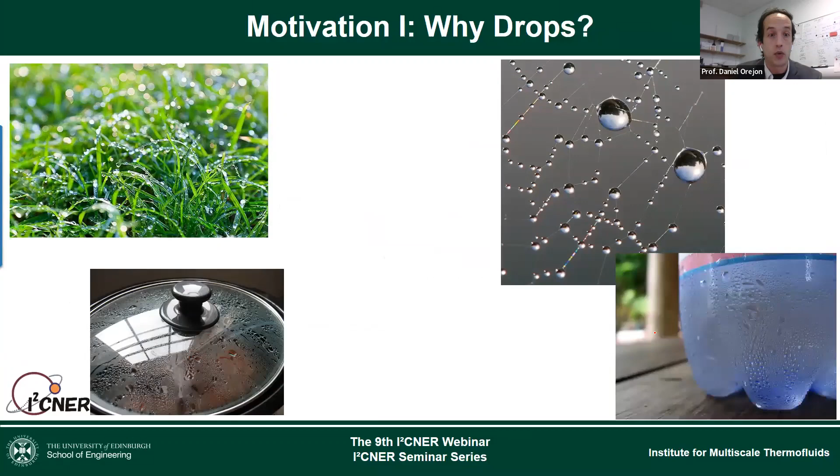So why drops? As you guys know, drops are everywhere in nature. When we wake up in the morning, we have drops in the grass, on our window glass. There are also drops in our glass of beer when we ask for some beer, and there is some condensation that starts to develop because the beer is cold and the wall of the glass achieves the saturation at the dew temperature, and water condenses on the wall.

There are drops also in distillation, drops and phase change in distillation of whiskey, for example. Since I'm in Scotland now, I always need to put this example. But above all, my favorite place to observe drops and liquid-to-vapor, vapor-to-liquid phase change, and I'm sure it's also Takata-sensei's favorite place, was actually the onsens in Japan, which I really miss. I haven't had the chance to visit Japan since December 2019, almost since the pandemic started.

So how can drops contribute, and how drops and of course phase change, both evaporation and condensation, how can we actually, why are they important to our daily life and to industry, for example. So I like to put this example.

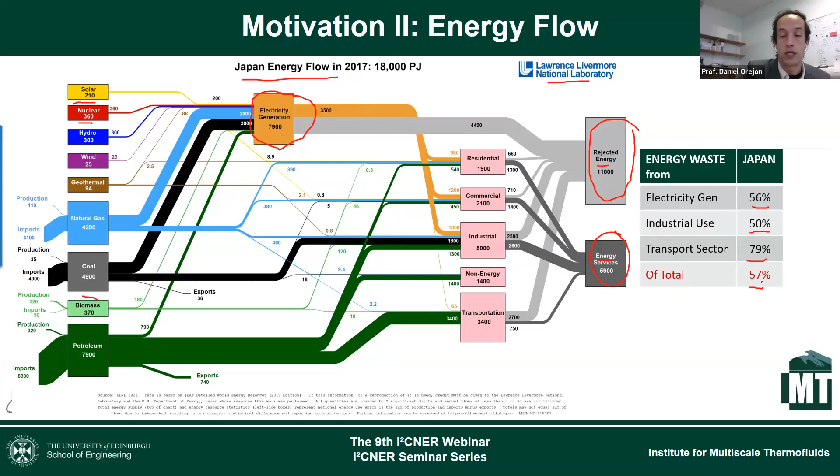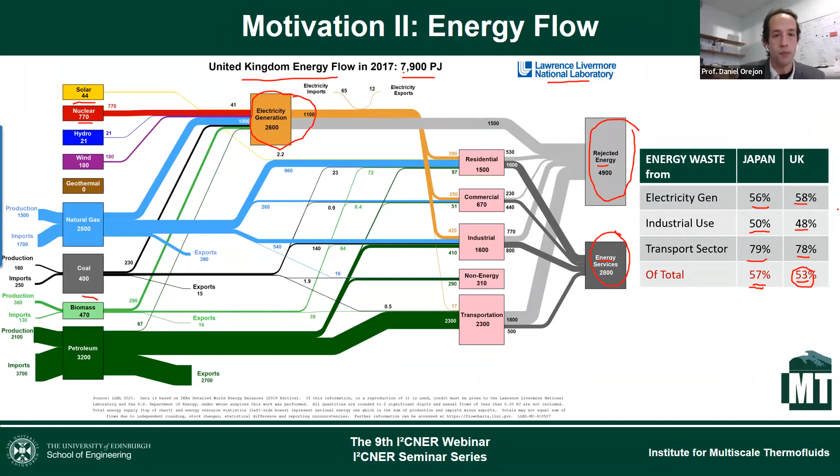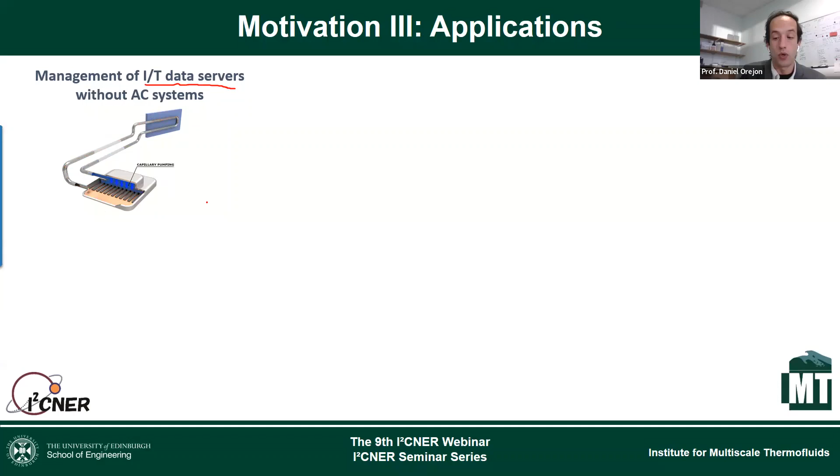So some of the applications where we could implement drops, phase change, evaporation, condensation to try to improve the system is, for example, for the management of IT data servers. Currently, air conditioning units and refrigeration systems account for 1 or 2% of the total energy consumption in the world. So they could be improved and we could have bigger savings.

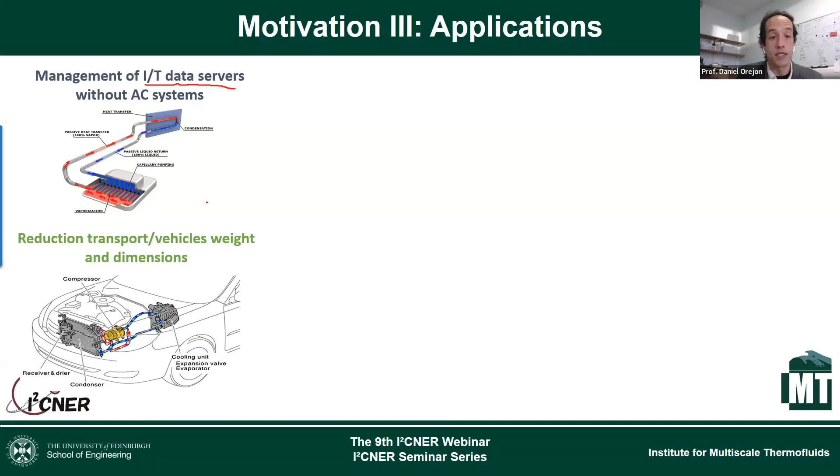In the case of cars, for example, for cooling of engines, if we were to implement phase change instead of single phase, we will be able to decrease requirements for the cooling system for the engine, reducing the weight of the car, and run more miles with the same fuel.

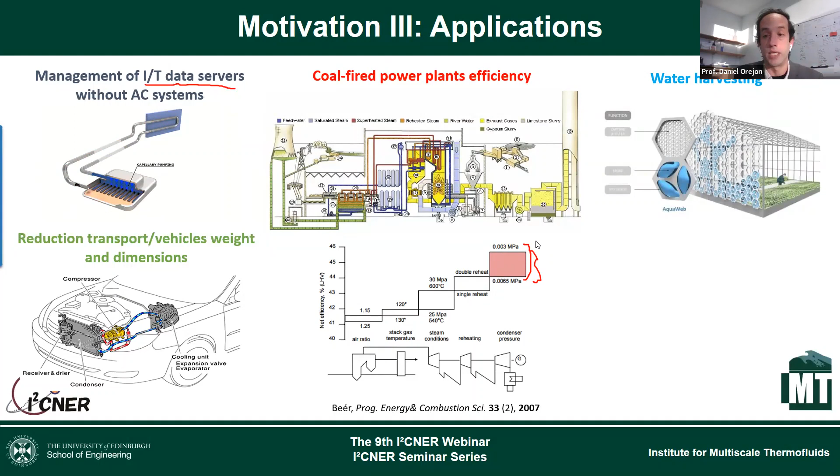And another application is also for water harvesting. For example, there are many regions that are arid and they don't have access to drinkable water. But as we know, in the environment, we can find water in the moisture of the ambient air that could, to some extent, be captured for our purpose.

All these kinds of applications, and my research as well, I like to link with the United Nations Sustainable Development Goals, more in particular with number 6, clean water and sanitation, and number 7, affordable clean energy.

So once I have introduced a little bit of the motivation, I wanted to give you a little bit of background. I don't want to put much emphasis here.

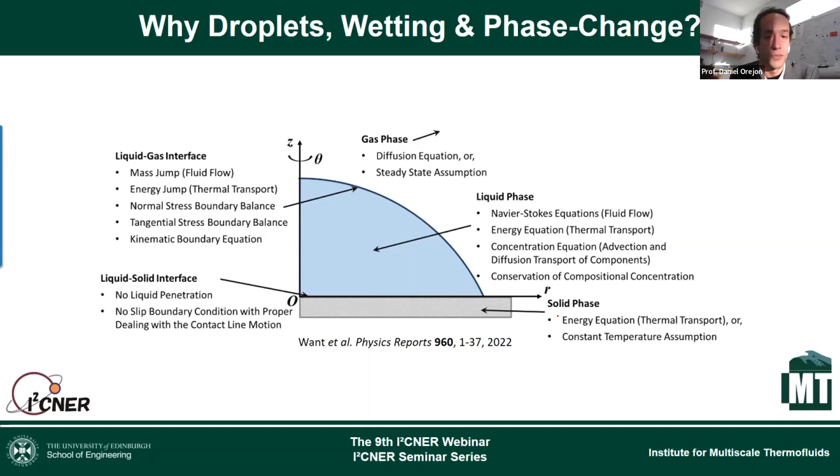So here is an example of a droplet evaporating, and we can see that we may have mass diffusion, convection inside of the droplet, heat transfer towards the substrate, and wettability also plays an important role. All this, as the droplet evaporates, can actually be utilized to create nice and confined patterns in the droplet. But it also helps us understand how the droplet evaporates and what are the final conditions upon the complete phase change.

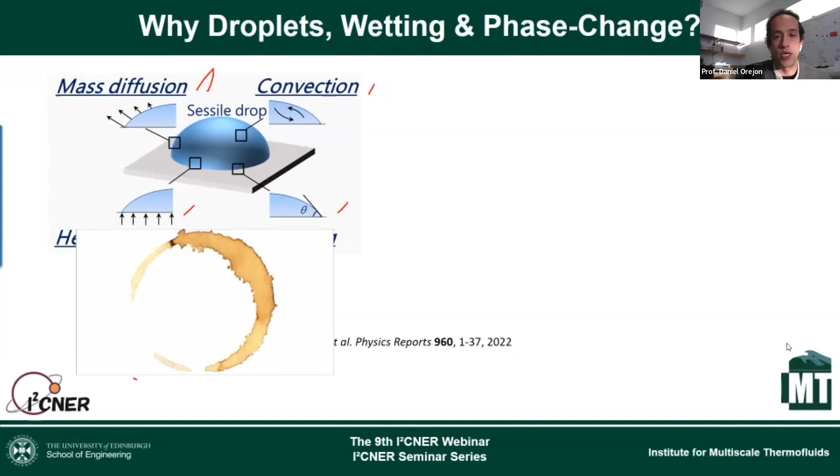And here on the left, we have the opposite phenomenon, because during my PhD, I was actually involved in the study regarding evaporation of droplets. However, when I moved to I²CNER, because of the capabilities of Takata Sensei's laboratory and his encouragement to dive into a different topic, I actually started to look into the opposite phenomenon, that of condensation.

As a simple aside, it looks like there will be many similar phenomena taking place, but you can see that in occasions mass diffusion, convection, and heat conduction actually differ. And depending on the wettability of the surface, you can have different condensation mechanisms and different shapes of droplets that, at the end of the day, are going to influence our heat transfer during phase change.

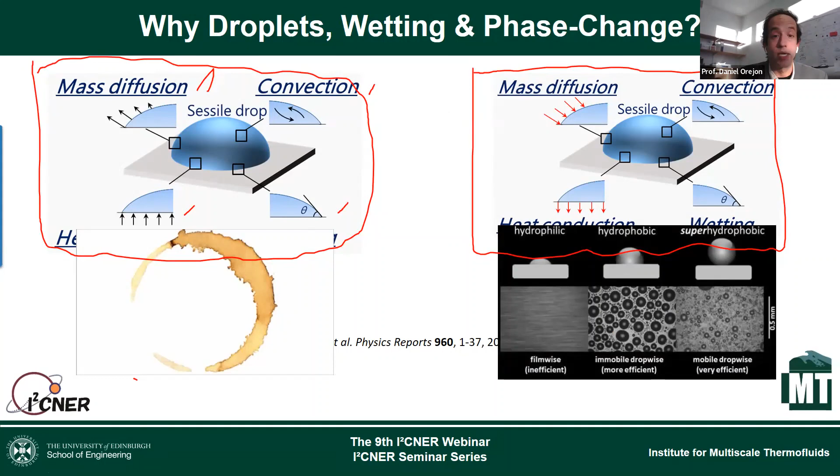So now that I have done this small introduction, I'm going to present the 4 different topics that I would like to introduce today. Maybe for the last one we will not have much time, depending on how detailed I am on the other ones.

But basically, I wanted to introduce here different fabrication techniques that I have explored in the past years. One of them is deep reactive ion etching. All this pillar fabrication technique has been done at the Scottish Microelectronics Centre. So this is kind of new research for me since I joined the University of Edinburgh.

I wanted to introduce soft lithography as well, and how we can replicate the features of plants using this technique. This work was done while I was an assistant professor at I²CNER. In both of these processes, we can actually get controlled structures. In the deep reactive ion etching one on the left, we have very accurate resolution, and we are the ones who decide what the patterns are.

In the case of soft lithography, we get very good microscopic resolution, a little less than nanoscopic. But with this technique, we can replicate and copy structures from other structures, or even from plants or living organisms.

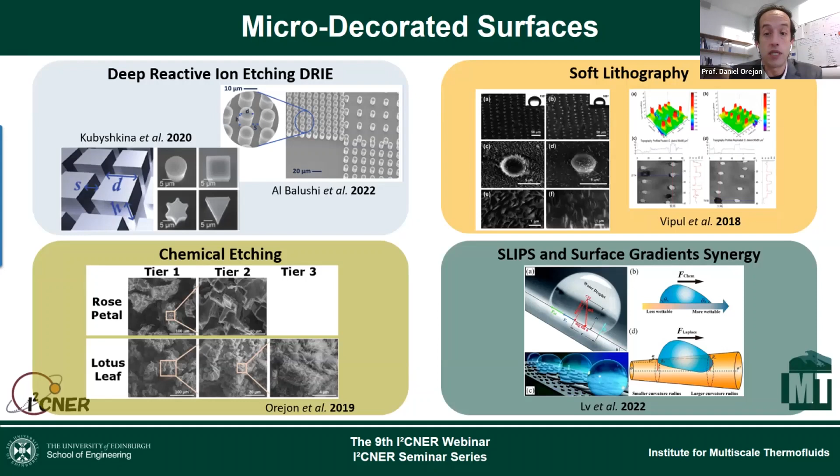Another topic I'm trying to combine lately is basically the use of structured surfaces that combine a wettability gradient or thermal gradient with SLIPS, or lubricant-infused surfaces, which we know have very low adhesion to a surface and are quite mobile.

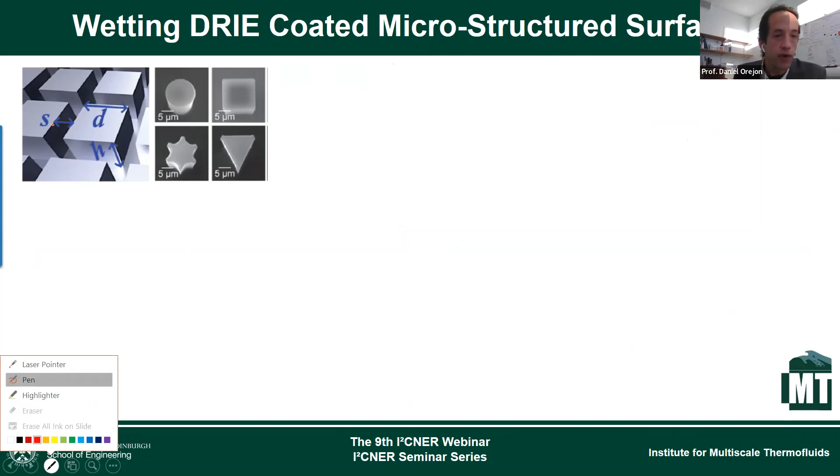So going into the first topic: wetting on microstructured surfaces. This is one of the projects I was involved in as soon as I joined the University of Edinburgh. In this project, we use surfaces with varying spacing but fixed diameter and height, with different geometries created: circular, square, star, and triangle pillars. Then we put these surfaces in our drop shape analyzer, sometimes within custom-built setups, so we can image from any side we want, from the top, from the side, and do analysis of the different azimuthal angles, for example.

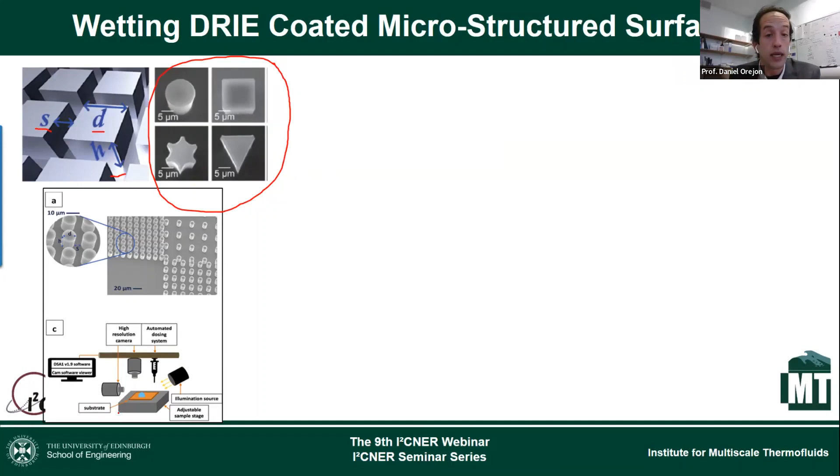So when we started this work, our student Veronika began with water on different pillar geometries with fixed spacing. In these geometries, what we see is just a drop that balls up and sits on the surface with very high contact angles because the surfaces are hydrophobically coated. So with a hydrophobic surface with structures and a high surface tension fluid, the droplet just balls up and does not wet the surface.

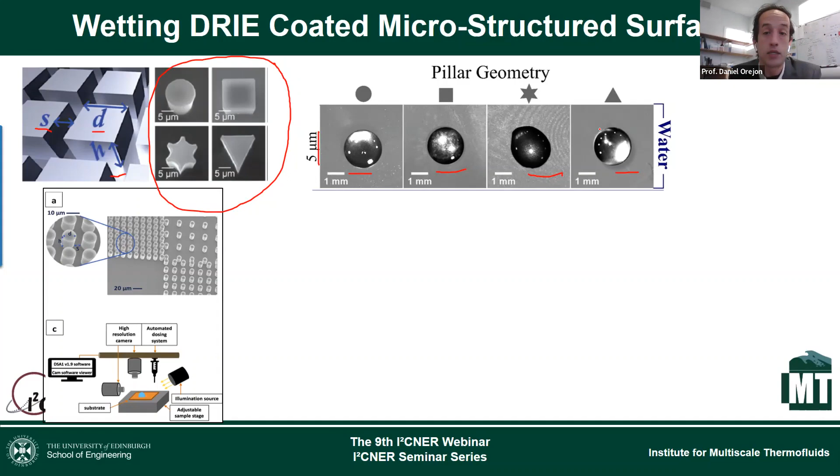However, when we move into ethanol, an organic solvent also very much used everywhere, it's necessary to know the different properties and characteristics: how it wets, how it evaporates. When we did this on these different surfaces, you can see that because of the wetting nature of ethanol, it tries to spread and wick through the structures, depending on the spacing here, and also depending on the geometrical configuration that we had.

So we had circular pillars here, square pillars here, a sort of star here, and triangle. We can also see that if the spacing is large, because the length scale of the spacing is larger than that of the microstructures, the droplets typically look very round because they barely see the structures underneath. They behave almost like on a smooth surface.

However, when we decrease the pillar spacing, because we have many more structures and the ethanol tries to wet all of them, the droplets start to acquire different types of shapes. So for regular types of structures, we typically go from a square, to octagonal, to circle.

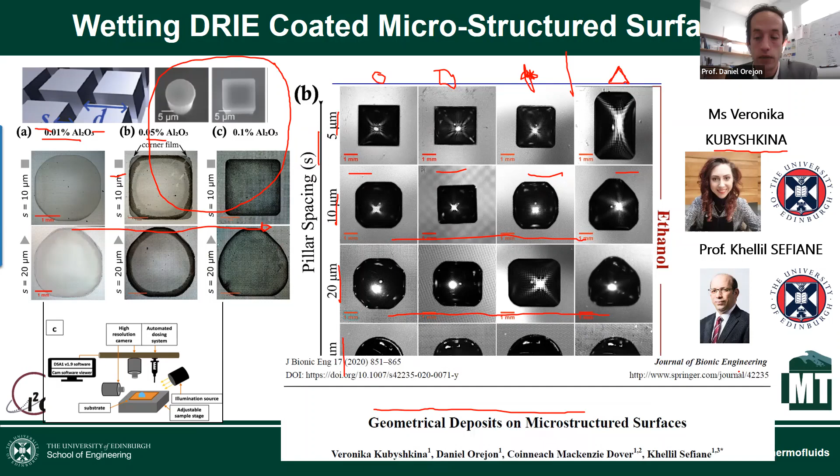This work was done by Veronika, and she got a couple of nice outcomes: a publication in the Journal of Bionic Engineering, and we recently also published a chapter within a book on the drying of complex fluid drops. What I just showed you is just a small taste of what you will find in both the publication and the book chapter, where we provided many more results, analysis, and discussion on the phenomena.

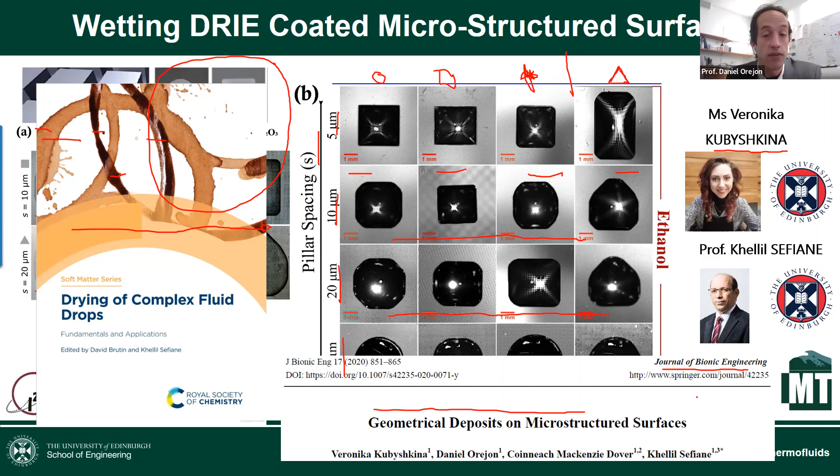So motivated by this, seeing how the different surface tension of the fluid may affect the wetting behavior, we isolated one type of geometry. In this case, we're looking into circular pillars, as we can see here, varying in spacing similar to what you saw before. All this work has been done by my student, Holud, who is self-funded by her government, the government of Oman.

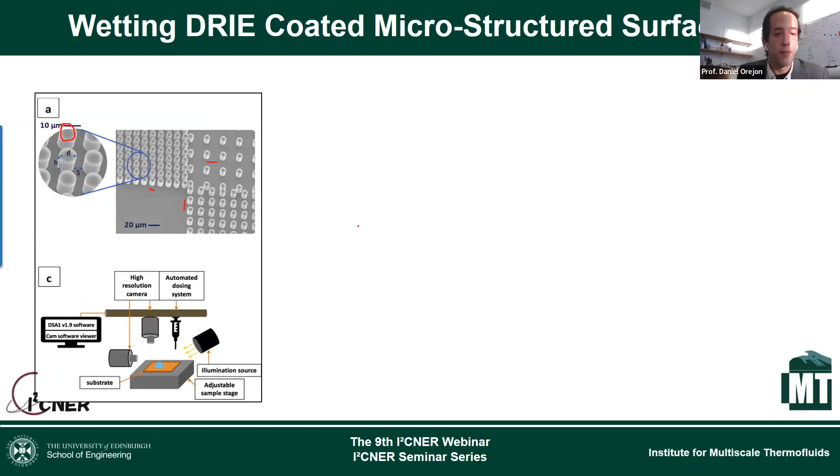So we had six different types of surfaces, six micropillar spacings: 5, 10, 20, 40, 80, and 160. And what we did is we varied the concentration of ethanol, so we have an ethanol-water mixture here.

So 0% means pure water, 100% means pure ethanol. From here, we can see that when the spacing is small, when we have water, a high surface tension fluid, the droplets round up and we have high contact angles like the one we saw before. This is typically called the Cassie regime, where the droplet just sits above the structures without wetting.

However, as we increase the concentration of ethanol, because the surface tension of the mixture decreases, lower surface tension fluids tend to wet more. They like the surface more, and the other way around. Because of this induced spreading, we are moving towards smaller contact angles. The droplets wet more, and we have a different regime here where it's still non-wetting, but not in the Cassie regime—it's in the non-wetting Wenzel regime.

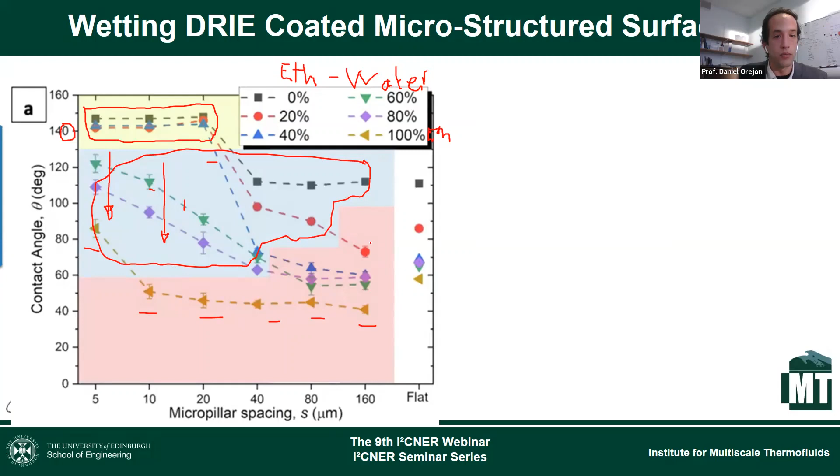And then we have this other region here at the bottom in red, where the droplets actually spread quite a bit, typically spreading more than they would on the original flat surface.

So here is basically the same kind of regime map, just based on ethanol concentration and spacing. As you can see, we can actually have different geometries of the droplet depending on the surface tension and the pillar structure.

As mentioned earlier, for large micropillar spacing, the droplets basically do not see the surface, and typically when we are on the right-hand side, regardless of the type of fluid, the droplets behave almost like on a smooth surface—round with a circular geometry. However, when we decrease the spacing of the pillars, the droplets start to see more of the structures.

For high water concentrations, droplets are round, as mentioned earlier. For high ethanol concentrations, the droplets start to acquire some sort of octagonal or even square shapes, as you can see here.

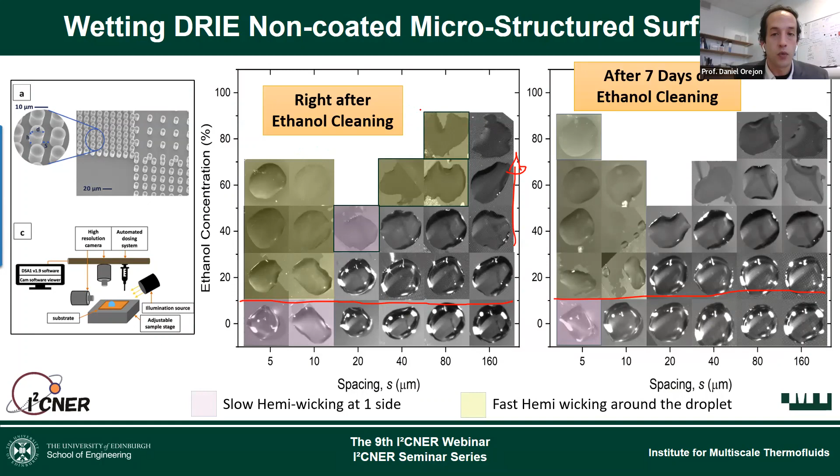There is also a change in the droplet shapes—they start to become more irregular, as you can see here. At some point, because of the low surface tension, the fluid just wets and spreads all over the surface. Comparing before and after cleaning with ethanol, there isn't much difference, so it's not so interesting.

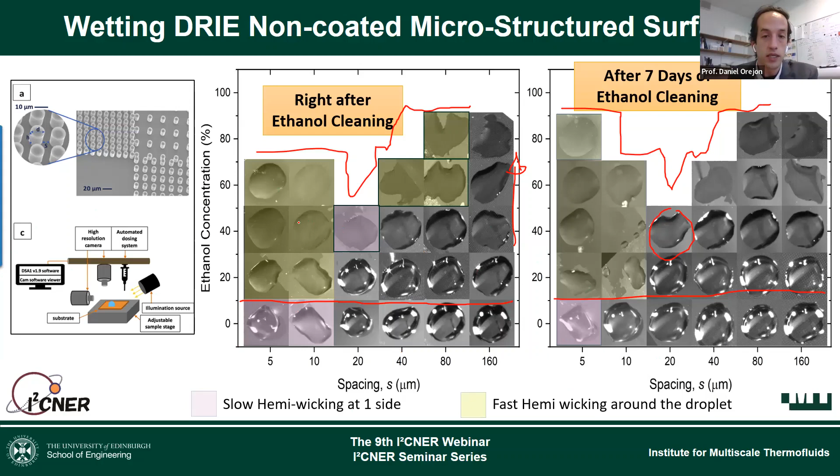However, when we clean the surfaces with oxygen plasma or air plasma, right after cleaning—this is for water—you put the droplet down and it immediately spreads all over the surface. So these are very high wetting surfaces right after cleaning.

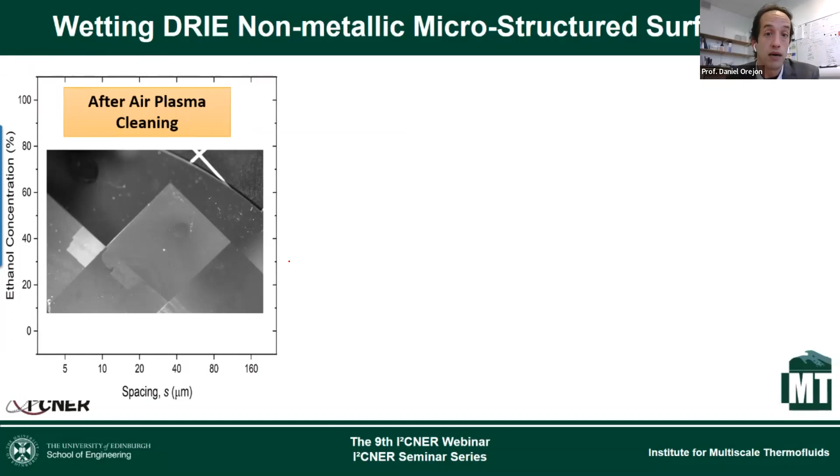Waiting 3 days, we start to see some kind of irregular shapes, but in most cases after the contact line we can see some sort of hemi-wicking behavior. So the droplet is not self-confined as it was after cleaning with ethanol, but it actually keeps spreading.

For high pillar structures, you can see that the droplets don't have an axisymmetric, or symmetric, shape at all.

However, when we wait even more, it is possible to get a more well-defined droplet footprint, and the droplets start to be more regular in shape.

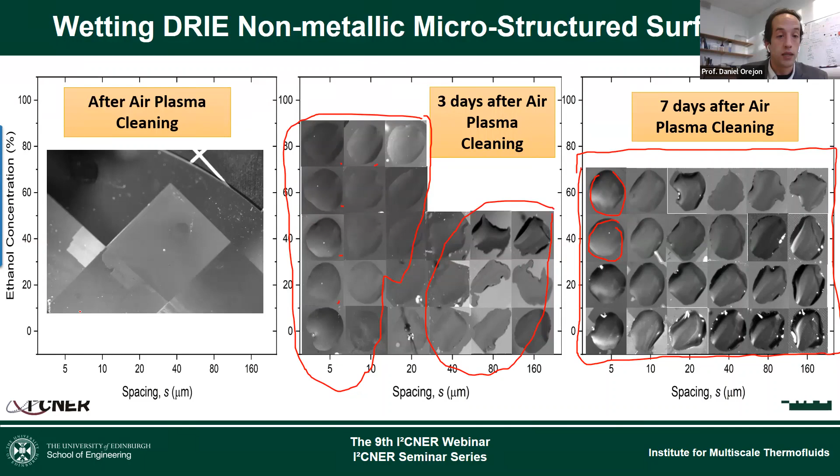With this, I wanted to point out that for hydrophilic surfaces, when the material is not coated, there is typically some interaction with the environment, and as time passes this interaction increases and the surface becomes more hydrophobic. This is why at the beginning we could not deposit or see a drop upon deposition, whereas as time moves forward we are able to see these droplets showing a nice shape.

Having talked a bit about wetting, I wanted to include our efforts on phase change, also on structured surfaces. For this evaporation study, we use hydrophobic coated micropillar surfaces.

These are the same surfaces where we saw the wetting characteristics before: when we have short spacing between pillars and high surface tension fluid, like water, we get nice, round droplets. Whereas if we move into larger spacing, the droplet starts to behave more like on a flat, smooth surface.

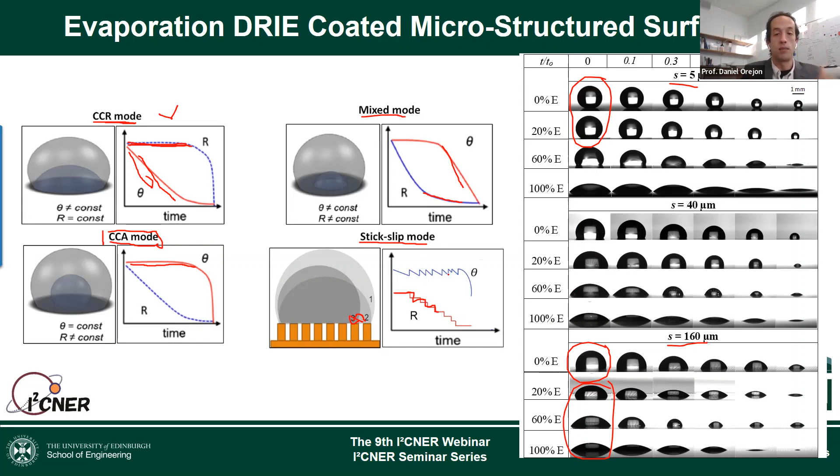And we also have a stick-slip mode, where because of these small structures, the droplet evaporates, and once it has evaporated a certain amount and gained a certain free energy, it is able to jump to the next pillar or pin. As a consequence, we get a stepwise fashion where the contact angle is pinned, then jumps, pins, jumps—while for each jump the contact angle increases to account for evaporation.

So those were the four main regimes. Now I'm introducing the experiments on high surface tension water and 20% ethanol water on 3 different pillar configurations. Remember, very close spacing versus large spacing, almost smooth surface.

When we look into these evaporation regimes, you can see here we have a solid line that represents the average, whereas the shaded area represents the standard deviation of at least 3 experiments. So you can see how hard my PhD student has worked. I think overall he has done more than hundreds of experiments on evaporation to try to understand better how pure fluids and binary mixtures behave on these surfaces.

But mainly when we look at the surfaces, what we can see here is that mainly we have droplets initially evaporating in CCR, as mentioned earlier, contact line pinned, and then it typically, because of the structures, goes into a stick-slip behavior.

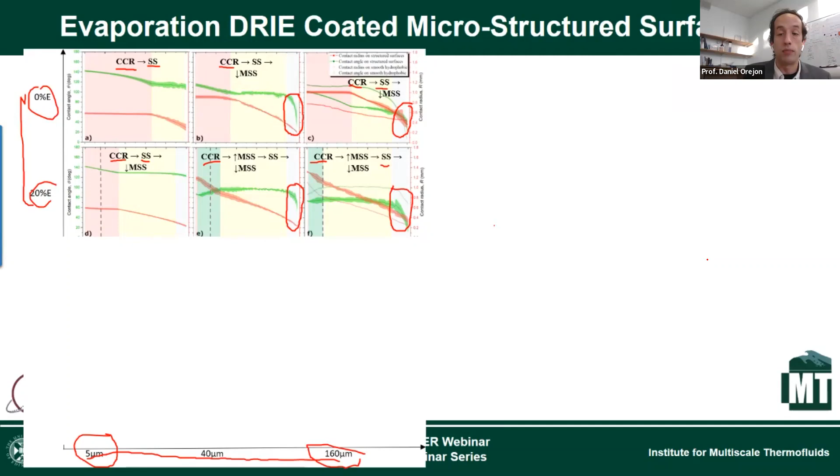So we have contact line pinning, jumping during the evaporation. But interestingly, because of the nice resolution of our measurements and our technique, we were able to focus really well at the very end of the evaporation, and we were able to report a different mechanism than the typical stick-slip. Remember the stick-slip behavior I just showed you before.

Typically, the contact angle always ranges within the same values when this stick-slip is happening. This is the case of this yellow area, where you can see stick-slip behavior of the contact angle, all the values remain oscillating within the same range. However, at the very end, where we are meant to have the typical mixed mode, because of the presence of the structures, what we see is actually a sort of decreasing contact angle mixed stick-slip mode.

So we don't have the stick-slip oscillating at the same rate. We actually have stick-slip decreasing, and understanding this is very important to pinpoint what is the surface energy, what is the shape, what is the behavior at the very last moments of the evaporation. In the case of droplets where we have particles dissolved, this will play a major role on how the deposits arrange. So it's very important to understand this.

When we move into higher ethanol concentrations, remember the droplets wet more of the structures. We are starting with lower contact angles, but as in earlier cases, we start mainly with the CCR constant radius mode because of the pinning. But it's very interesting in this — actually for 20 and 60%, what we saw is that there is a region where you can see how typically the contact angle either stays constant or decreases because of evaporation, right?

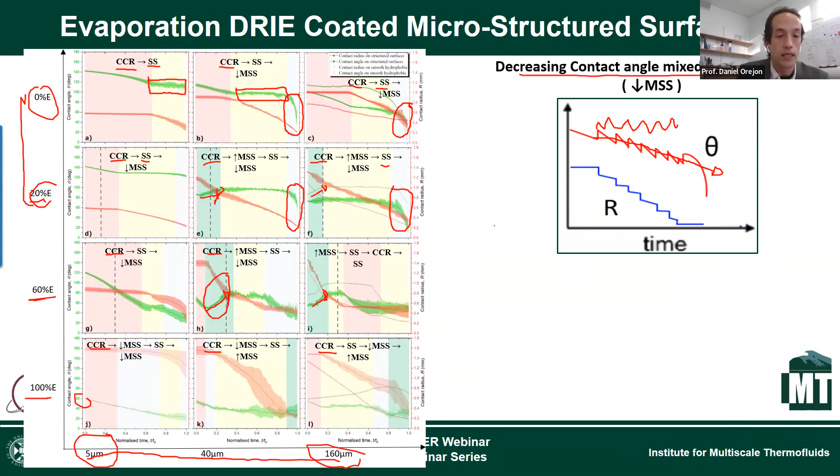But as I am drawing here now on the surface, you can see that in all these cases, there is actually a regime, a time where the contact angle is not decreasing but actually increasing. So we are having this other behavior also in a mixed stick-slip fashion. This behavior has also not been reported before, and it's important because this increasing contact angle also affects the radius. If there is conservation of volume, increasing contact angle means the radius is going to decrease faster, so the footprint of the droplet is also going to decrease faster, as pointed out here.

This mechanism here above, as you can see, is just a consequence of the evaporation and the presence of structures that induces more pinning, and it doesn't allow the contact line to recede quickly enough for the contact angle to keep constant. However, in this other case down here, probably Kita-san and Takata-sensei will know the reasons for this, because in the past we worked with ethanol and water.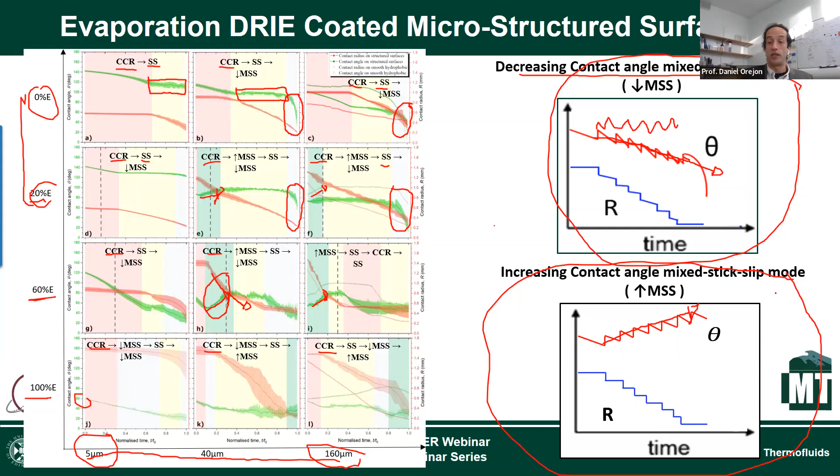We actually worked with ethanol, but as we were evaporating ethanol in the conditions we were investigating with high relative humidity, the ethanol was actually transitioning into water. As that happened, the surface tension of the fluid changes and increases, because water has higher surface tension than ethanol. And what was happening is that our contact angle was increasing in time as the droplet evaporated, all the way to the contact angle of water.

Here it's not exactly the same, it also happens for our case with 100% ethanol, but the main reason here why we are having this mixed stick-slip with an increasing contact angle is basically that we have an ethanol-water binary mixture. Ethanol is more volatile than water. As ethanol evaporates, the surface tension of the droplet also changes. So as ethanol evaporates, the droplet behaves more water-like, and as such it wants to be more round.

It wants to be more spherical. As you can see here, the contact angle, as reported earlier, increases. So these are two new mechanisms complementary to the stick-slip, where our contact angle increases and decreases depending on the conditions studied.

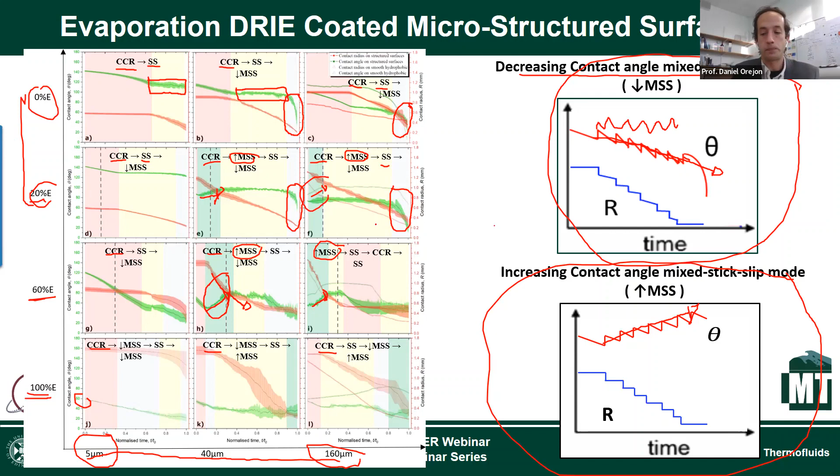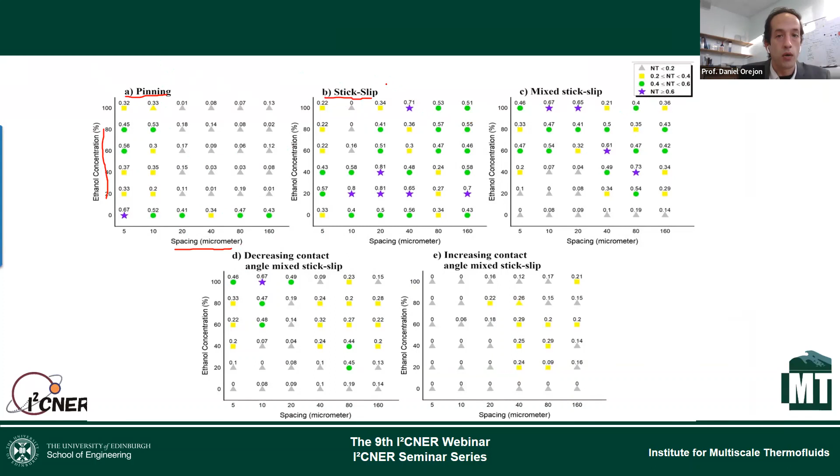So my student also, in order to give more insights on how droplets evaporate on microstructures, she analyzed the different normalized times at which the different droplets, ethanol concentrations, and pillar spacings show how the normalized time of the different regimes behave.

As we can see here, we are able to draw this sort of boundary, where for small spacings and for water, a high surface tension fluid, we actually get pinning of the contact line for longer. So typically the initial stage takes longer for the contact line to depin and move into a different droplet footprint.

Than when we look at the different ethanol or binary mixtures. Regarding the stick slip behavior, it looks like there is a big boundary here. So most of the droplets on structured surfaces will display this sort of stick slip behavior.

Note that here this is the traditional stick slip, reported in the literature, with the contact angle range varying, whereas here we also have the mixed stick slip where the contact angle either increases or decreases. For this mixed slip mode, as mentioned earlier, we need ethanol in most cases, above all for the increasing contact angle mode. We need some ethanol present in the mixture.

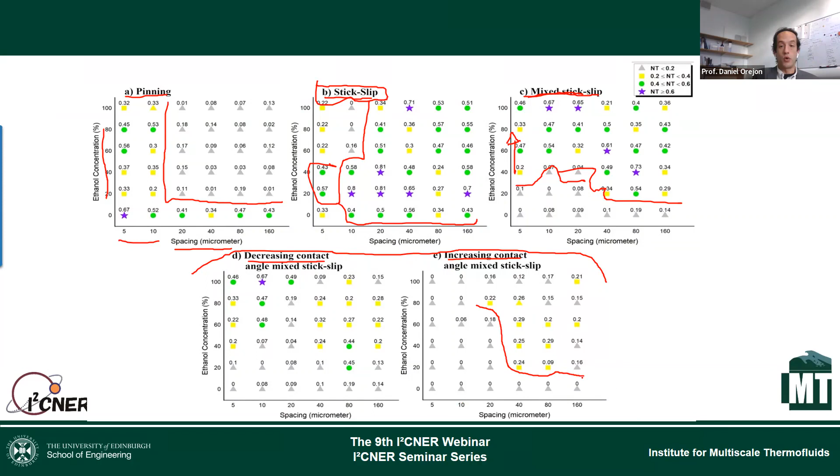These two figures at the bottom just tell us from the mixed stick behavior how much the behavior is in the decreasing contact angle mode or in the increasing contact angle mode. And as pointed out earlier, for the contact angle to be able to increase as the droplet evaporates, there is a need for having ethanol on the surface.

So next, as you can see here, the behavior is very, very complex. There are so many parameters that we can look at to try to give some nice further explanations on the different wetting behaviors as well as phase change.

And these figures here give us a bit of a summary on the jumps of the contact line as they evaporate. I think the main takeaway points are basically that when we have short spacing, all this stick slip behavior is governed basically by the structure. So most of the jumps taking place during evaporation are in the same order of magnitude as the pillar spacing.

This is true for 5 micrometers, 10 micrometers, and 20 micrometers as well, where you can see the average values are always in a similar range as the pillar spacing. However, when we move into larger spacing, we can see that these average jumps of the contact line now, in most cases, lie below the pillar spacing of the different droplets.

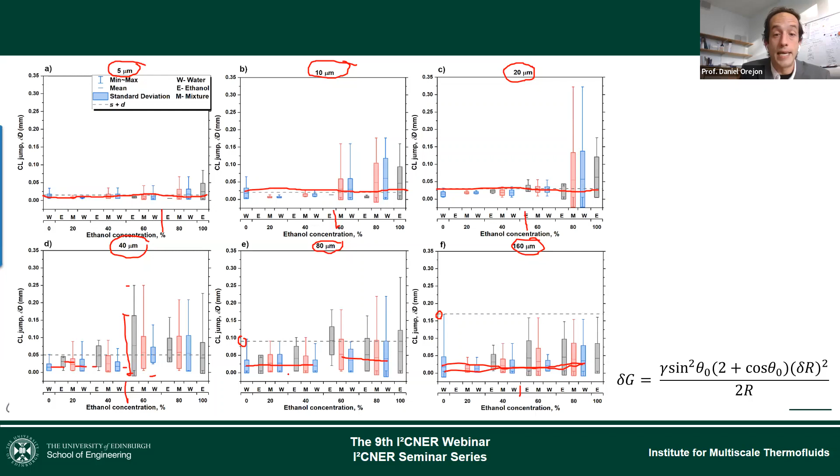Notice also from this figure that as we increase our ethanol concentrations, for 60% or above, the deviation on the measurements, the standard deviation, maximum and minimum values, also start to get bigger. This is because at higher ethanol concentrations, as I mentioned earlier, we are getting more irregular shapes, square, octagonal, and those irregular shapes play a major role on the pinning behavior of the contact line.

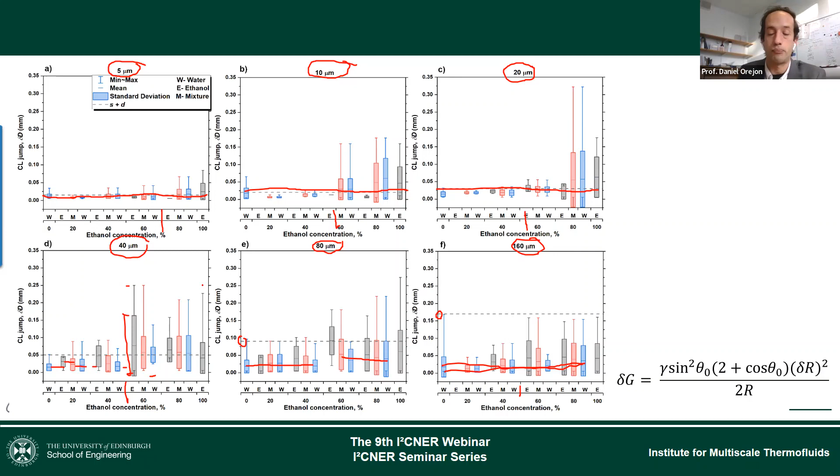So this work was done mainly by my student, Khaloud, in collaboration also with Professor Sefiane. And I was very glad for her that she received the best poster for experimental research at the UK Heat Transfer Conference.

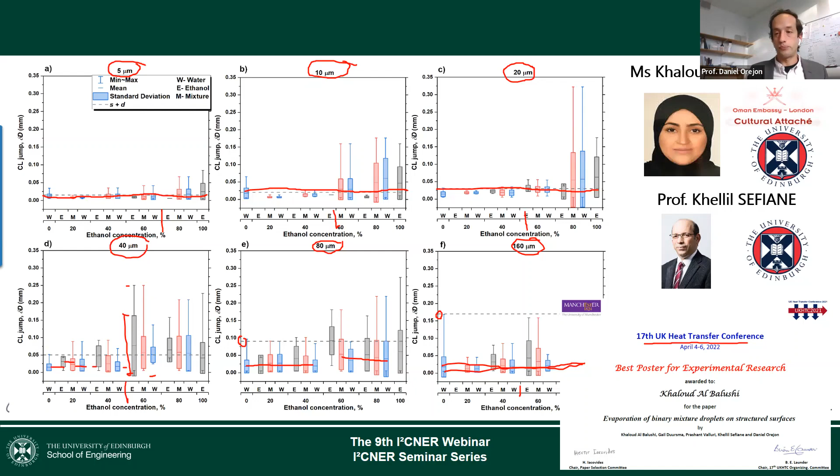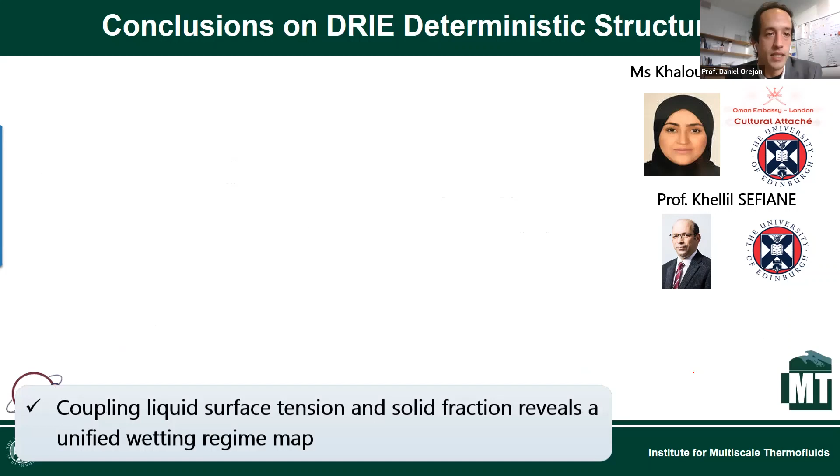So I think I'm going to do a summary of this, and I'm going to skip to the very last part of the presentation. Although I had a couple more topics to talk about, for the convenience of time, I think I should end the presentation here.

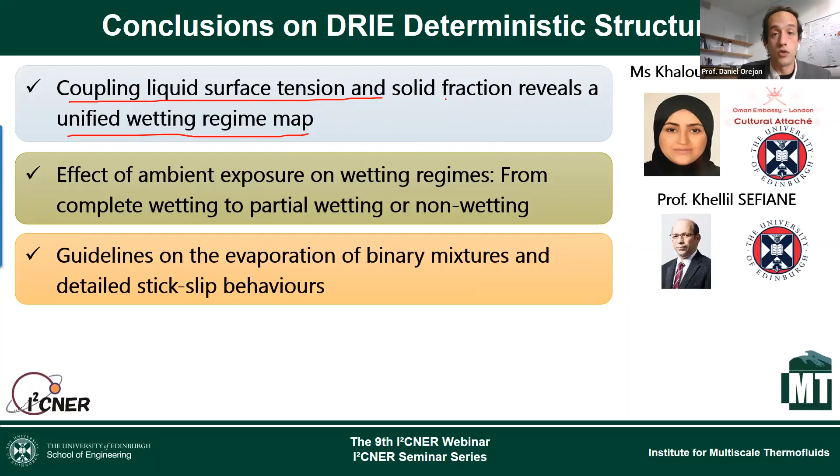As I mentioned earlier, the first part of the talk was to provide a unified wetting regime map that couples surface tension and solid fraction, so that in the future, if we want certain droplets with certain shapes on a surface, we are able to utilize the size and surface tension of the fluid we want.

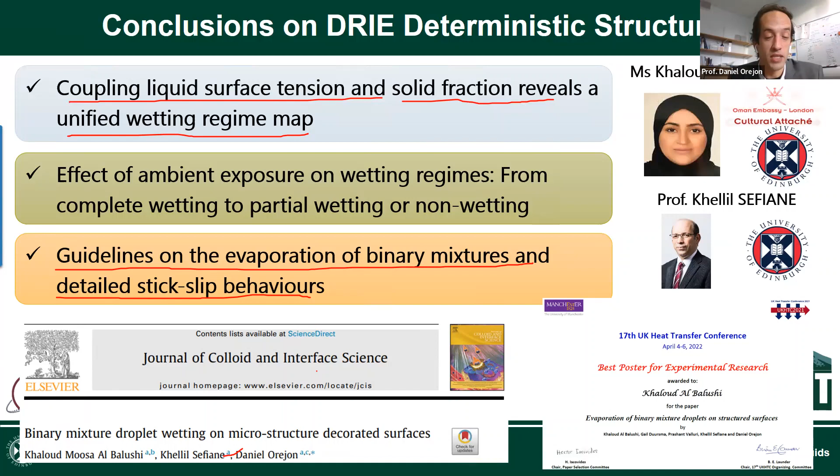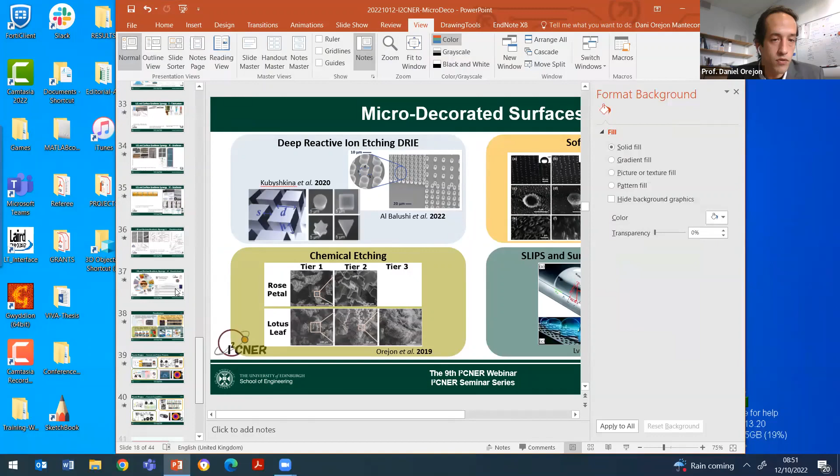I just wanted to introduce very quickly in this slide that we are not just doing all the research that I just presented, looking at the wettability and different surface tension of fluids, but we are also very much interested in how the atmosphere actually interacts with the surface and how the wettability changes over time, as one of the parts I mentioned before.

And I am very happy to be able to keep working on this topic with some of my collaborators that I acquired while I was at I²CNER, for example Professor Takata, as well as Professor Miljkovic from UIUC, and other colleagues of his that some of them might also be in this presentation.

I secured a small grant from the Royal Society, and I was able to buy this very nice microgoniometer that I had the pleasure to use at the University of Illinois when I was on a placement there, to be able to study the advancing and receding dynamics.

And I have a PhD student, Janice, who has just started last week. I'm also very much interested in functional surfaces for condensation phase change, and to this end I have a PhD student working on this topic.

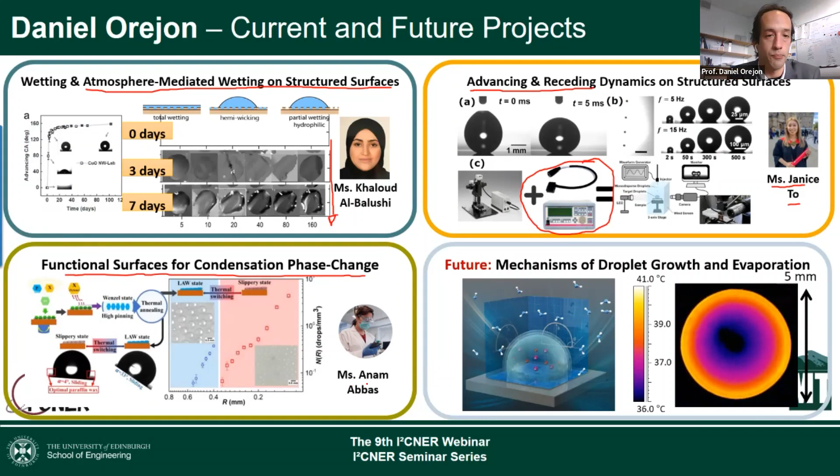Here, very briefly, are some of the capabilities from my lab, in case you like any of the topics or research that I introduced before, and you would like to explore any of these techniques.

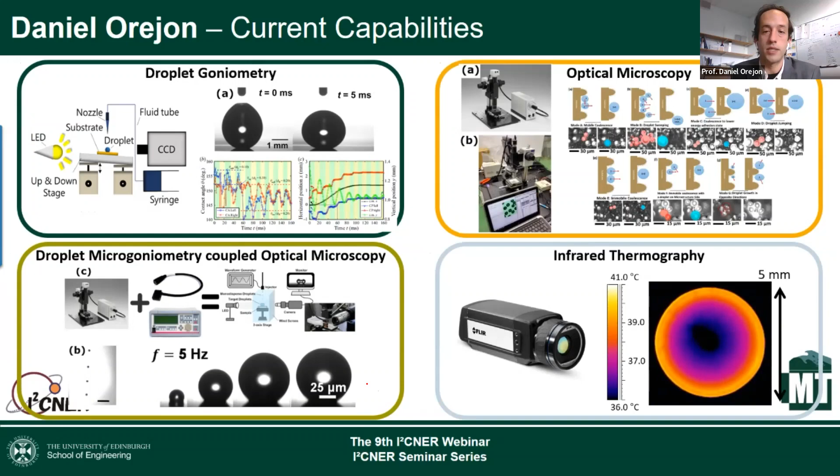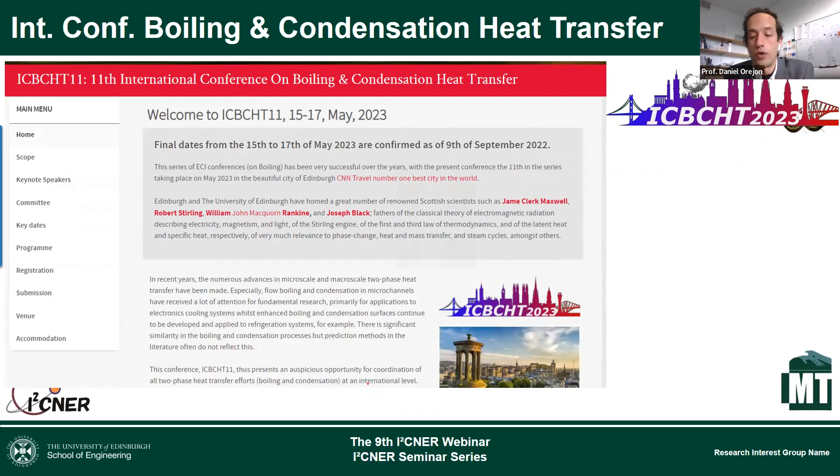Just to finish, I would like to introduce that we are organizing the International Conference for Boiling and Condensation Heat Transfer, which takes place this May in Edinburgh. We have already secured very well established researchers in the topic - one of them is Professor Takata, here acting as chair today. I hope to be the chair of his session to pay back. We also have Professor Nenad Miljkovic, who will be a keynote presenter at this conference.

As a bonus, Edinburgh has been selected by Time Out as the first best city in the world, even over Chicago. So this topic is of interest to much of the research carried out at I²CNER within our thrust - research carried out by Takata Sensei, Miljkovic Sensei, etc.

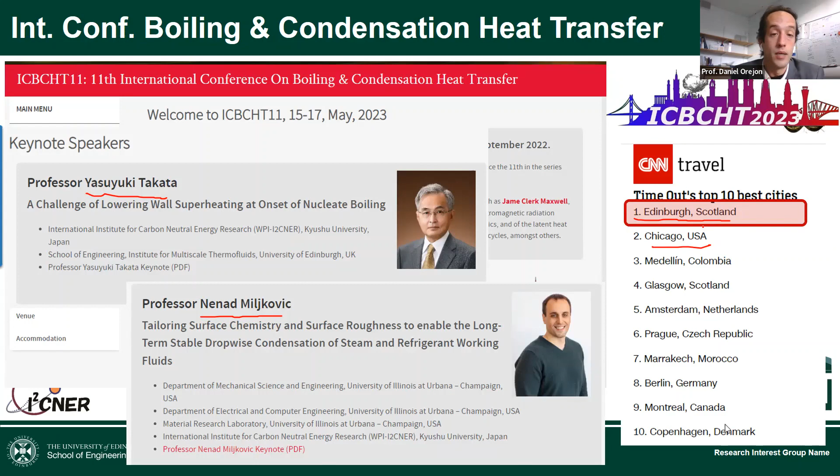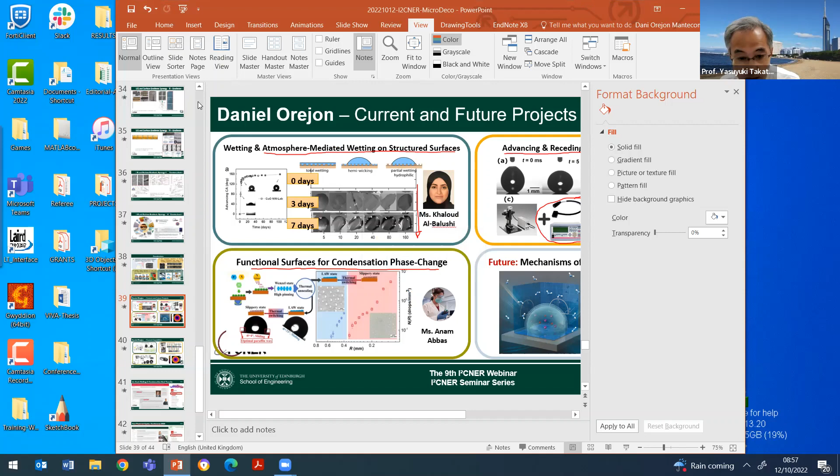And of course, Wan-san, please. Wan-san, will you ask a question? Moment. Question disappeared. Disappeared? Sorry. I can see it here. So we cannot let them ask the question. I can read though.

So thank you very much, Danny-san. Thank you, Wan-san, for attending the talk and for your nice comments. So your question is about slide 9. I think, am I sharing the screen, Sensei? Yeah, yes, this is slide okay, 9. So slide 9. So your concern is about the evaporation of alcohol very fast and how long the measurement takes, and how to avoid evaporation effect and get systematic results.

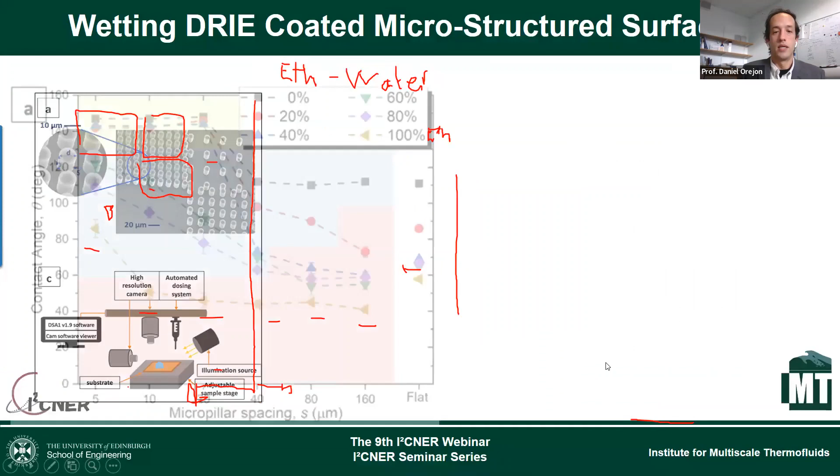So completely agreed with you, Wan-san. It's very important, as we know ethanol evaporates very, very, very quickly. And it can even evaporate a little bit when we are dosing the droplet. So when we are creating a pendant drop before deposition, we are already starting to have preferential ethanol evaporation. So here, I think my student tried to minimize this, and the only way without implementing very complicated control measurements is to ensure the measurements are done as fast as possible. So she was dosing and depositing the drop within the first few seconds, as well as acquiring the contact angle right after deposition. This was carried out several times - she repeated experiments 2 to 3 times.

So you can see that for water, actually there is not much of an issue. And for water, independently of the spacing, the deviation is very small, because we are having pure water. Also for high water concentrations, the same. But when we move into more pure ethanol, and above all in short spacing, where the structures have more impact on the wetting and the final shape of the droplet, you can see how the standard deviation actually increases. This is also related to the more asymmetric size of the droplets, as well as later on with the preferential evaporation, as you mentioned.

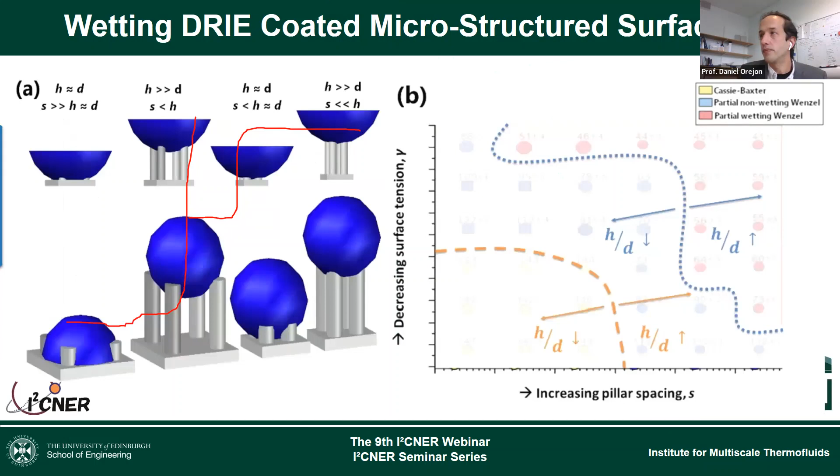Okay, thank you. So we have two more questions on the message. Excellent. First one is from Yutaka. Okay, so great talk, Dani-san.

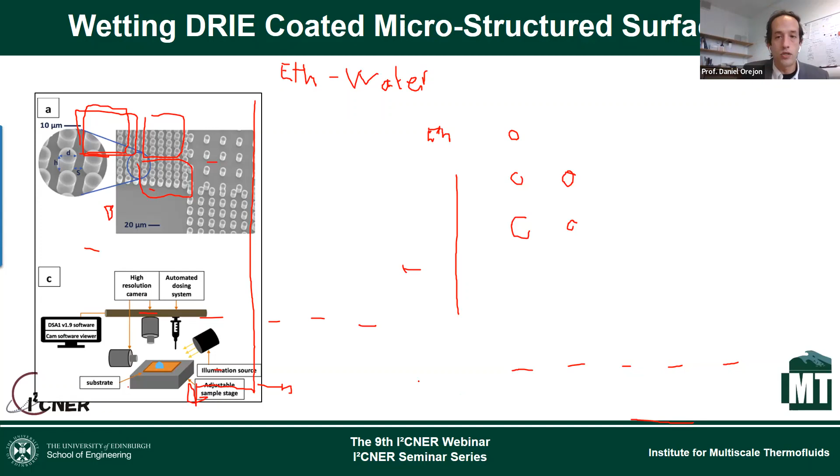I really understand your question, because for this type of surfaces, hydrophobic micropillars, to some extent the droplet can be in a sort of super hydrophobic regime. I remember Kita-san has done very beautiful experiments on similar surfaces where he used to put the droplet at the boundary between two different surface tensions, two different geometries, and he used to see how the droplet moves. And as he knows, sometimes if the surface is very hydrophobic or super hydrophobic, it's very difficult to deposit the droplet. In this case, because of the large surface tension, surface area in the case of short spacing, and because of the sort of wetting behavior when we increase the spacing...

These droplets, we used to put the syringe, dose the droplet on the syringe, and after the droplet is brought into contact with the substrate, either by bringing the droplet down or by bringing the substrate up, and then separating them. And on these surfaces, because the contact angles are not as high as on a super hydrophobic surface, there was no need for us to drop the droplet from the needle as in other types of experiments or more super hydrophobic surfaces where it's kind of needed. So basically just moving the droplet or the surface into contact with each other very gently until they touch, and then detaching them very gently.

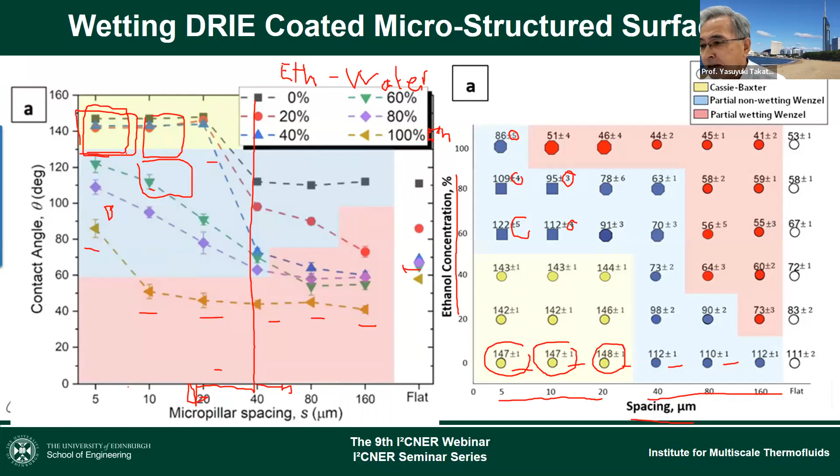Okay, the next question is from Nguyen-san. Thank you so much for the wonderful presentation. I am very new to this field, so I want to ask a very naive question.

In the wetting DRIE coated microstructure surface, why is the difference between symmetrical round drop and asymmetrical drop important?

Thank you very much for the comment and the question. Maybe I didn't put much emphasis before, and some schematics would have helped even more to explain this asymmetry of the droplets. As a reminder, when the spacing is large, this means we have structures very far away from each other. So when the spacing is large, the characteristic length of the pillar is much smaller than that of the spacing.

Then the droplets, when we put them on the surface, they barely feel the structures, and this is why these droplets typically have a very round shape. Even in these cases for ethanol, they have a very round shape, and their contact angles are very similar to those on the flat surface. So for large spacing, just think there are very few structures - the droplets just behave like on the smooth surface and present a circular footprint.

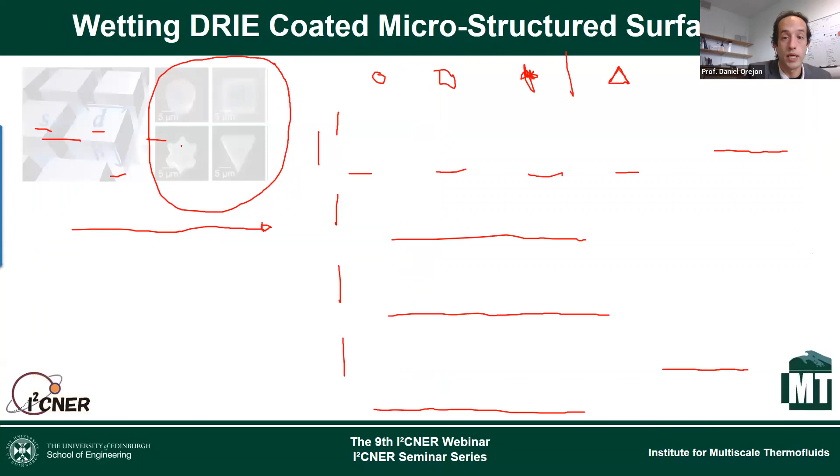And typically when we have symmetric patterns of the pillars, we can see that the geometries of the droplets are also symmetrical, whereas when we have non-symmetrical pillars - in this case a triangle - the droplets elongate in the direction of the triangle. So again here, different geometries, and it's because of the interplay between the wetting liquid, the pillar structures, and the pillar spacing, how the fluid is going to spread or wick within the structures, giving this final geometry. I hope I answered your question.

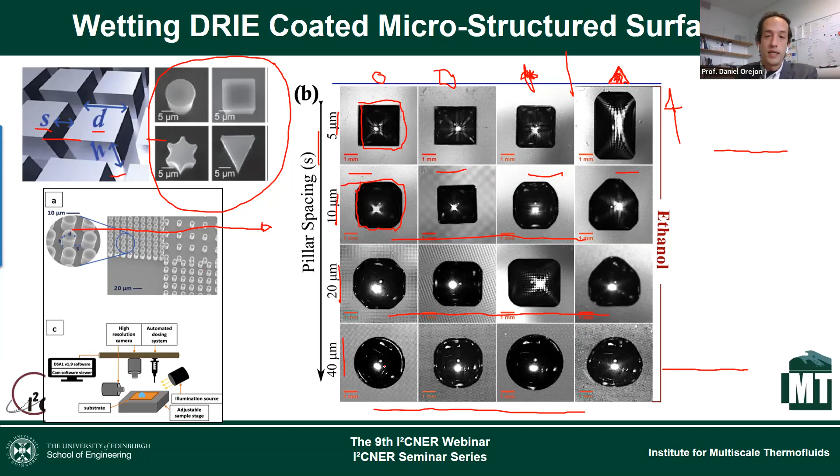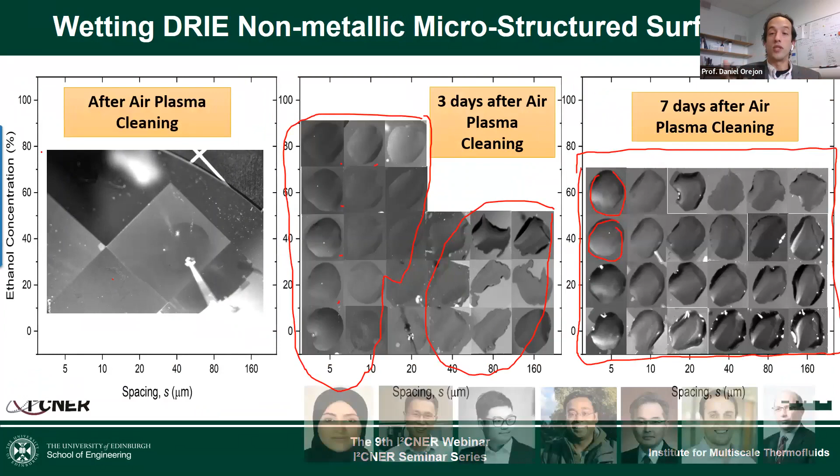What we have found is that in occasions, you actually don't need a coating to make your surfaces hydrophobic. This is what I showed here, and this is also in some work with Professor Milkovic. You don't need the surface to have a coating. Sometimes just with exposure to the ambient, you can make the surface a little bit more hydrophobic. So if you ask me what is the main mechanism governing all this shape of the droplets, definitely wettability.

Wettability. All right, okay. So in the future, it's a very difficult question. Yeah, basically, yeah, I know. Maybe you can come to my office and we can discuss, or I will explain using sake or beer.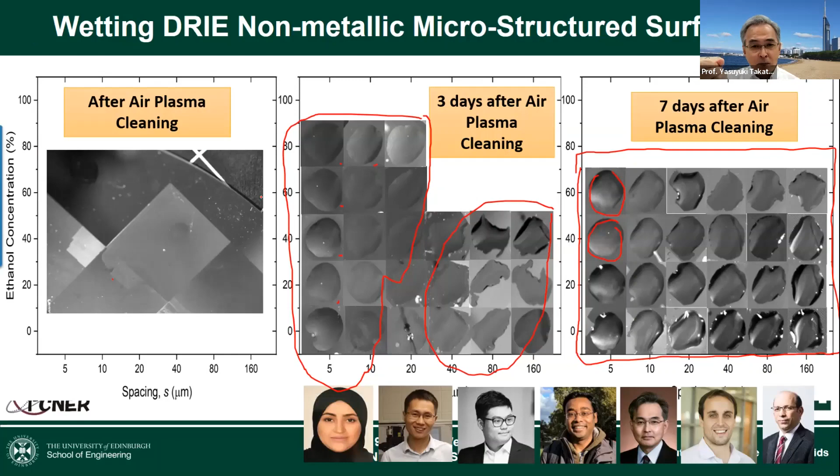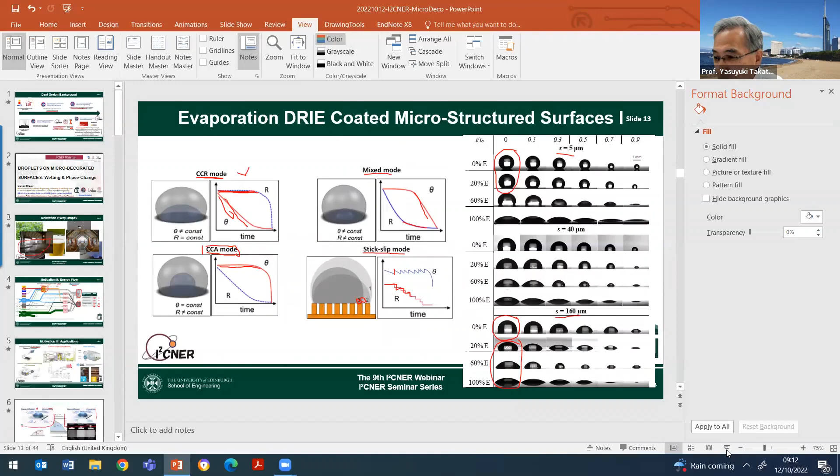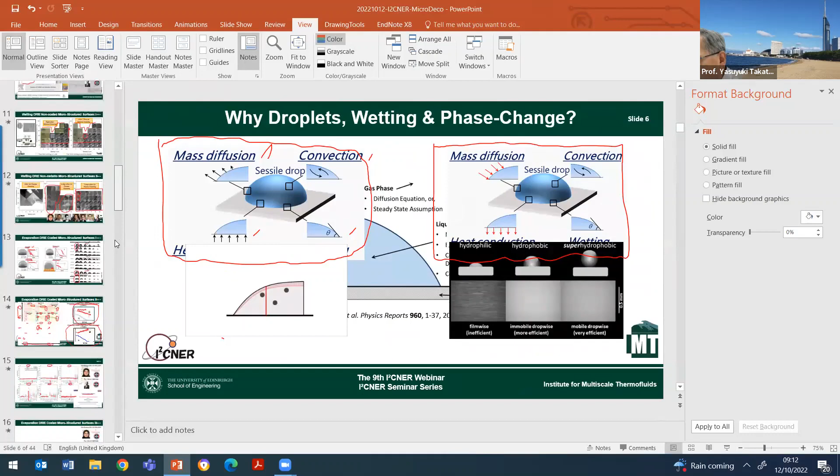Okay good, droplet, very good. Thank you, and okay, coffee as well, right, Sensei? Dani-san, one more question, one more question from anonymous. Thanks a lot Dani-san, it was great listening to you. Apart from the DRIE method, can you briefly speak about soft lithography method?

Soft lithography, all right, thank you very much for this question. I had it in my presentation. Normally we try to have like one slide per minute when we do a presentation, more or less, but I think I spent all my 45 minutes just with the first 18 slides, so I was not able to introduce any of this research on soft lithography. Basically this soft lithography was done when I was assistant professor at I²CNER. We had this PhD student, Vipul, who is actually now a postdoc at Finland University, and he was very much interested in bio-inspired materials.

What he did is basically he identified from many different types of leaves the dragon's lily, or Gladiolus dalenii, as a potential candidate for exploring water harvesting. Then he got some leaves that, as you can see here from SEM images done at Kyushu University, show how the microstructure arrangement, the microstructures and nanostructures, are present in a very well arranged manner.

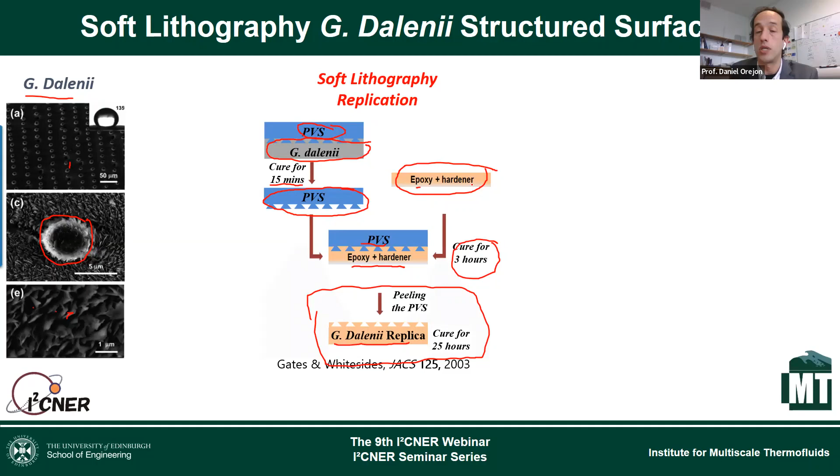Then what you need to combine is this negative replica with the epoxy and hardener, also in a kind of malleable state, so that once you put your PVS that is solid, it's going to mold and give the positive replica, trying to replicate again the structures of the original surface. For this process, 3 hours curing, and then again you just peel the PVS as we did before. We remove it and we get the replica on this material epoxy that is actually hydrophobic.

We also did an SEM on these structures, and you can see that at the micro scale, the arrangements, the spacing between the structures is kind of kept. We also have lines of these small microstructures, and the size and diameter of these microstructures were quite replicated. It was also able to replicate trenches inside of the leaf, the PVS was able to go inside, and we were able to get it here. So at the micro scale, very good, very accurate replication.

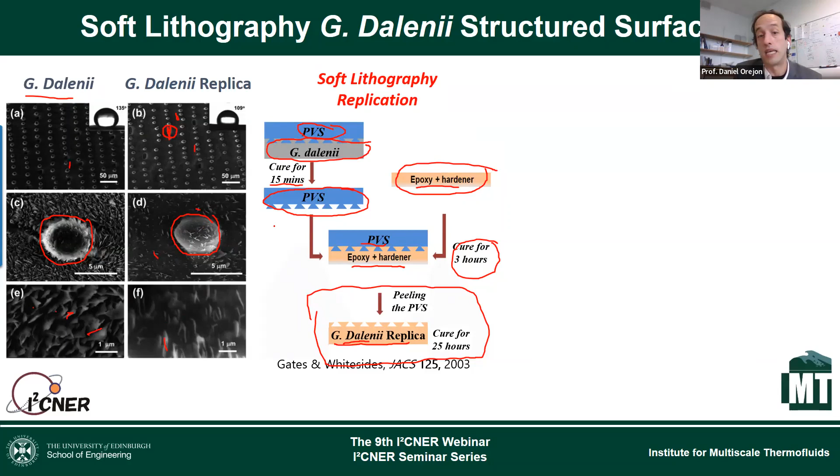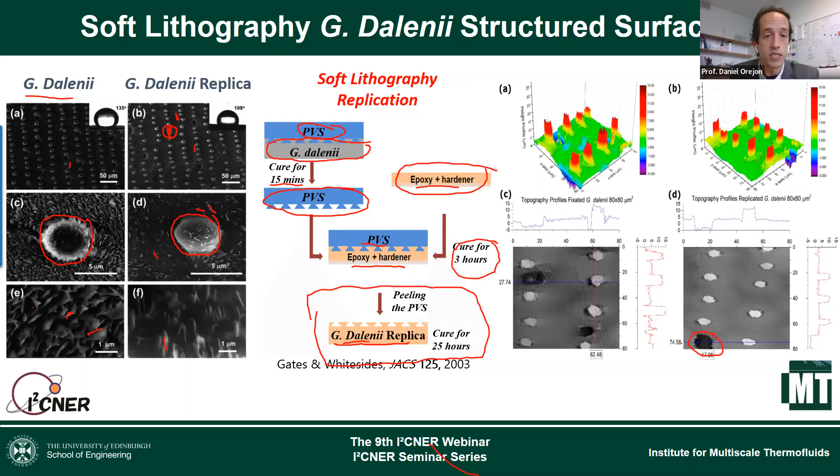When we were looking at the nanoscale though, you can see that for nanoscale features, it fails a little bit more, so a different technique will be better to replicate the nanostructures. Here you can also see scanning optical microscopy that proves the size and spacing of the microstructures, as well as the depth of these trenches, were replicated in a very good way. Then we took them and investigated the mechanisms of condensation, wettability, as well as fog harvesting for these specific surfaces.

And just in case, you can get more details on this paper, published also with Takata Sensei and with Venkata and Harish, who was a previous I²CNER member as well. So I hope this gives you enough details on this specific topic.

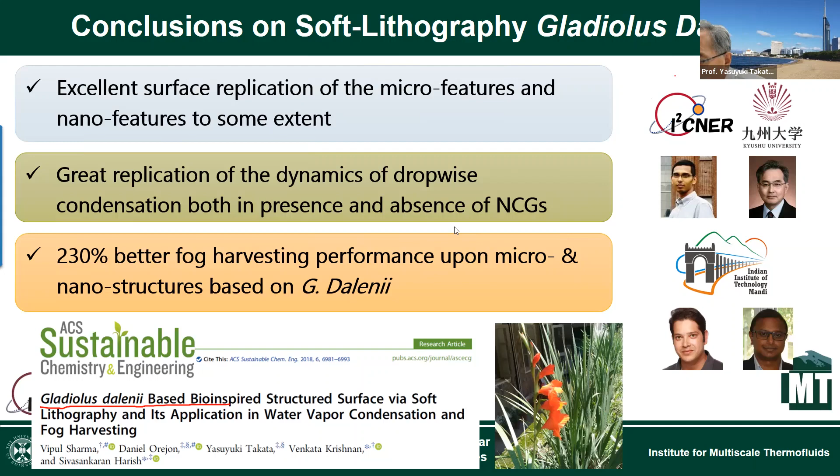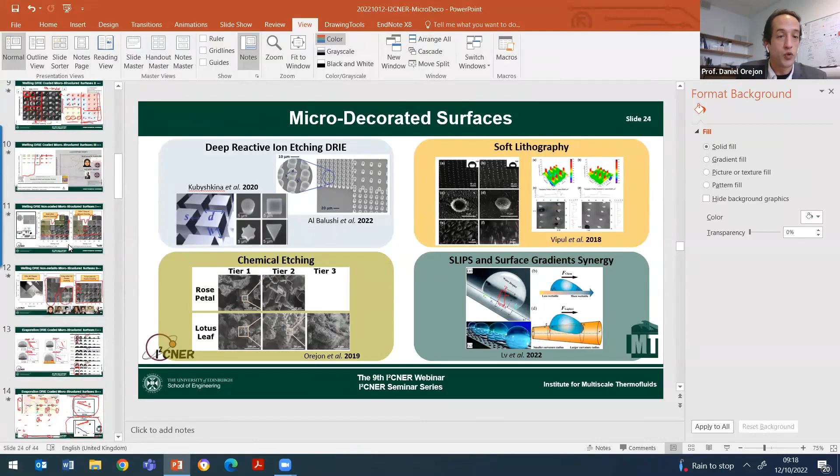Very nice and good question. Yeah, I think for my next presentation, if not especially on this topic, I need to create some nice schematics and figures, right, Sensei? I think for me this is kind of well understood, but I understand that for I²CNER, not all of you being in this topic, it becomes a little bit more complicated.

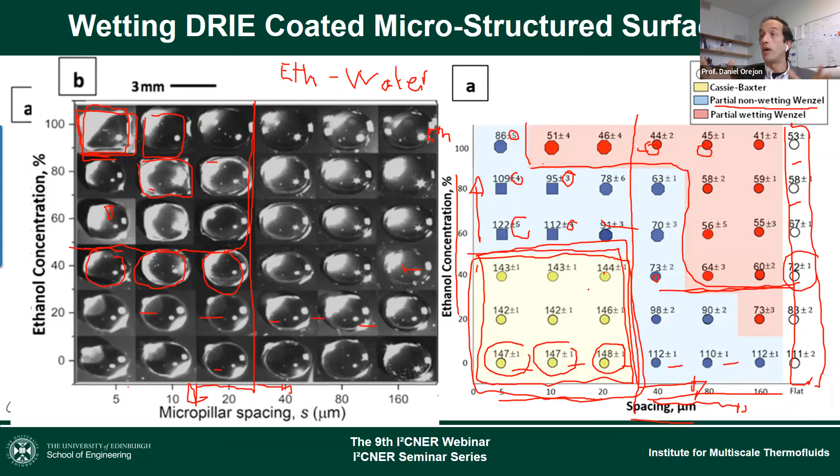For example, I remember we have a publication with Takata-sensei where, in the case of Leidenfrost, we were able to decrease the Leidenfrost temperature by decreasing the pressure of the system. So at some point for this Cassie state, if we decrease the pressure, the Cassie state will be enhanced, whereas if we increase the pressure of the system, we might reach a point where we don't have this Cassie, and the droplets will actually sink into the structures.

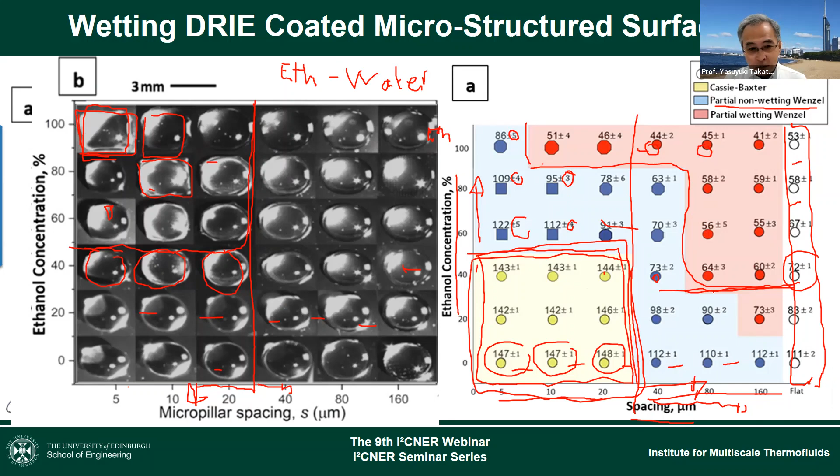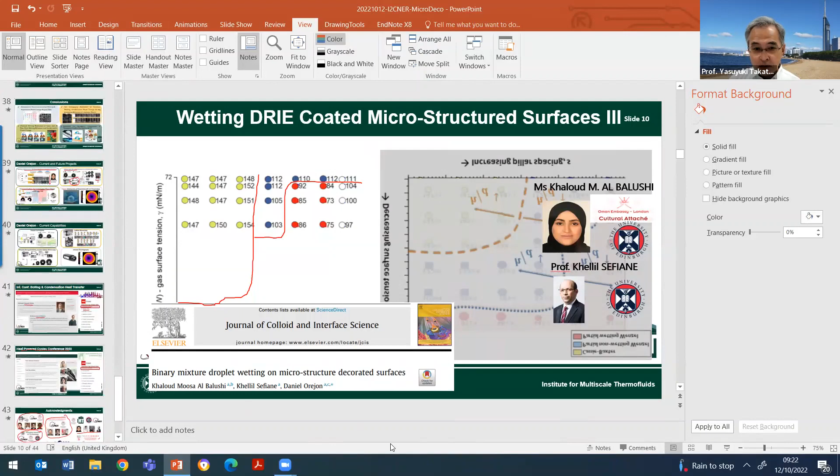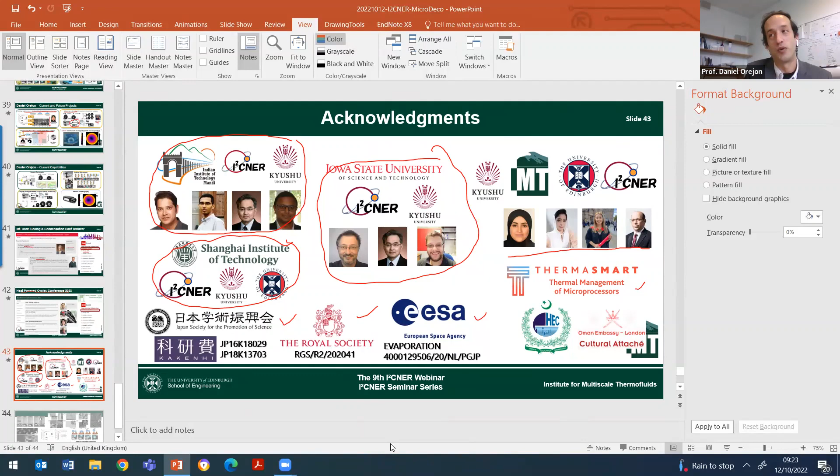Okay, so I'd like to close this excellent webinar. Thank you for your talk, Danny-san, and thank you to the audience for participating. Thank you all, and Takata-sensei, I'm looking forward to having you in May here. Hopefully some of you I²CNER guys can also come to one of these conferences, or just visit our beautiful city. I hope I can go to I²CNER also at some point. I really miss Japan—I miss Takata-sensei and many of the colleagues I met during my time there. Okay, thank you. Bye all, see you, bye bye.